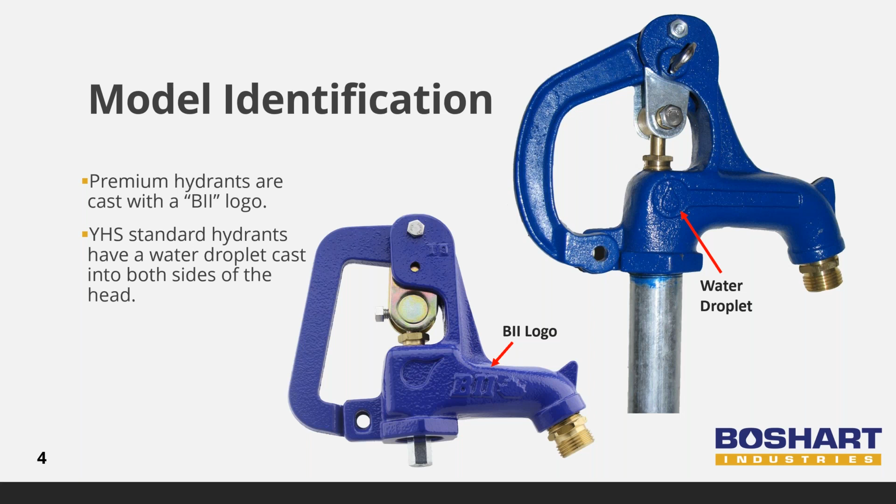So let's start off with what exactly is a yard hydrant.

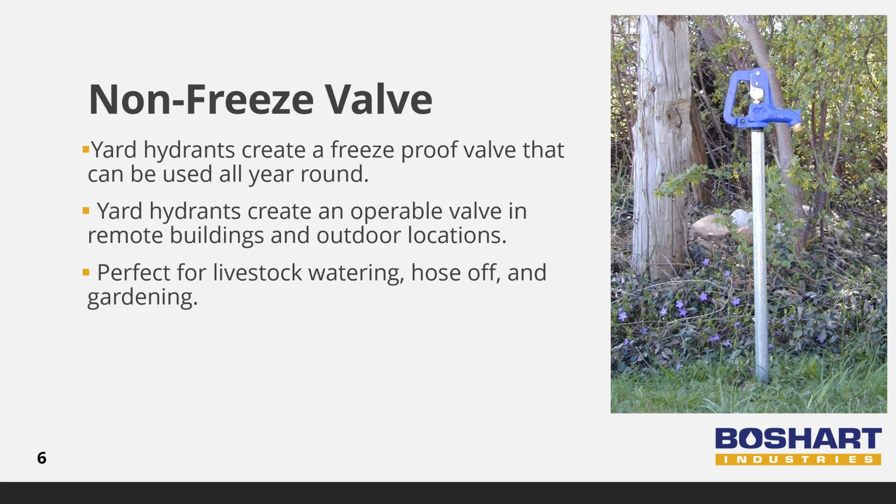Yard hydrants are frost-free. This means that they can still be operated in the winter when the temperature is below freezing, but there is no risk of freezing in the hydrant or in the service line, which would cause damage. Yard hydrants are just valves at a basic glance. They have a handle that operates the flow of water coming in and out of the hydrant. They are extremely popular for watering livestock, for outdoor hosing, and for gardening, all at a distance from the main water supply or the house.

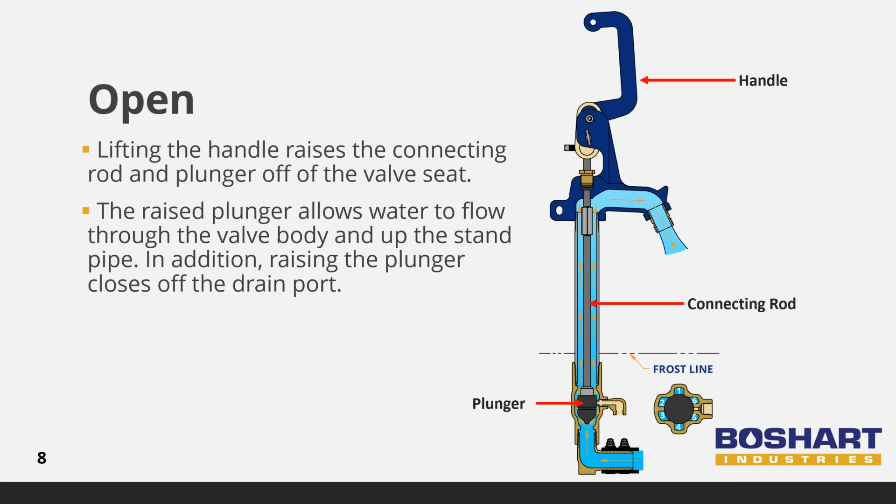But how does a yard hydrant prevent freezing in below freezing temperatures? When the hydrant handle is opened, the connecting rod raises the plunger off of the valve seat. The raised plunger closes off the drain port and allows water to flow through the valve port past the plunger. The water then flows through flow channels, up the standpipe, and finally out of the discharge spout.

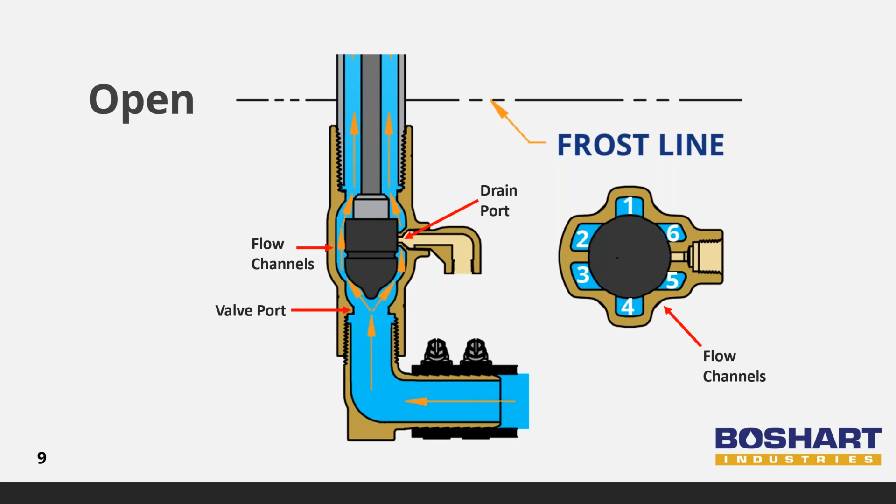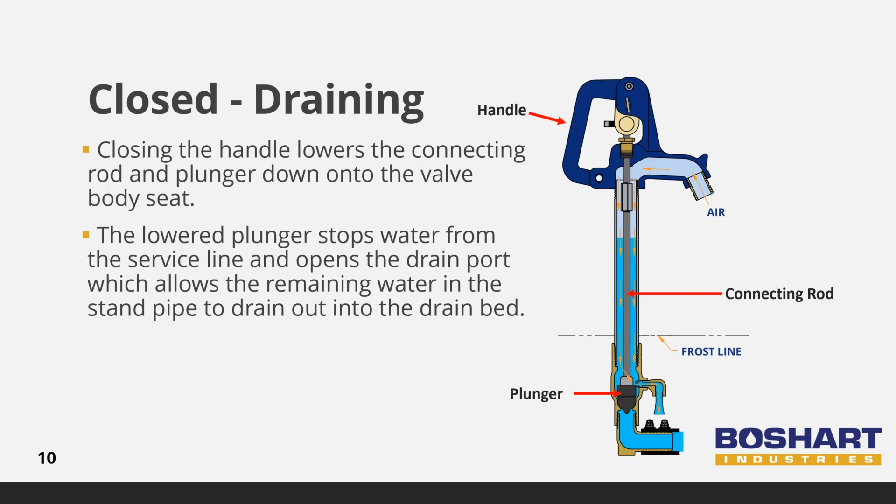When the hydrant handle is closed, the connecting rod lowers the plunger against the valve seat. This stops the water flow from the service line below the frost line where freezing does not occur. As the plunger is lowered against the valve seat, it opens the drain port and allows the water in the standpipe to drain back down and out of the drain port into the crushed stone drain bed.

For proper draining to occur, air must be able to enter in through the spout. Attaching a hose or some other device to the spout can prevent air from getting in and therefore stopping the draining process. For this reason, a hose should never be left attached when freezing temperatures could occur.

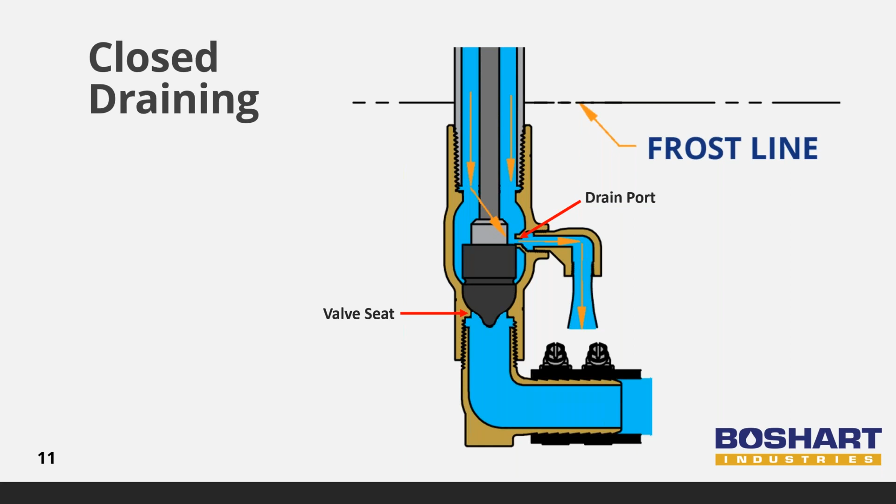The time it takes to fully drain the standpipe is approximately 45 to 60 seconds for a 4-foot bury hydrant. Depending on the bury depth and the quality of the drain bed prepared, the drain time could take more or less time.

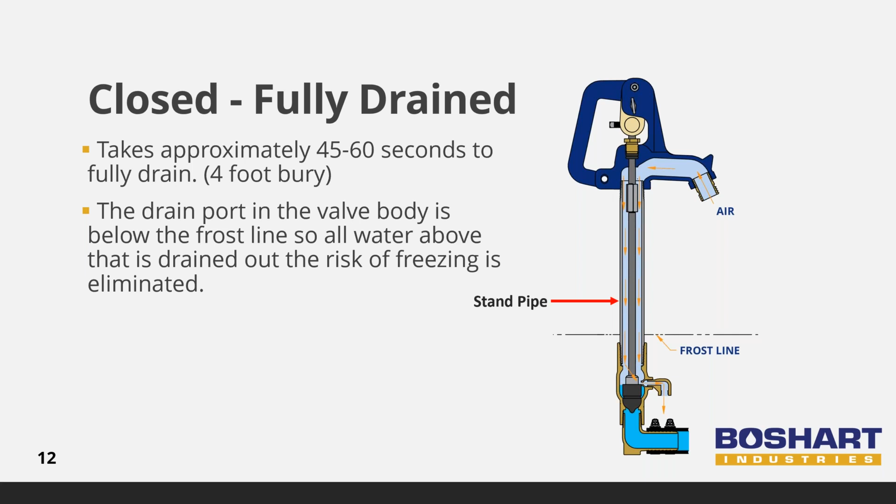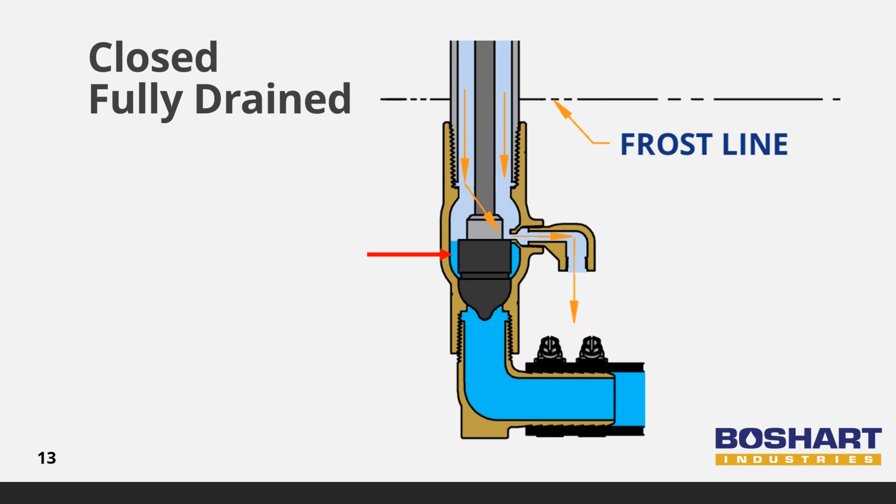When the standpipe is fully drained, only a very small volume of water remains in the valve body as shown by the arrow, all of which is below the frost line where there is no risk of freezing. All the water above the drain port opening is discharged into the crushed stone drain bed.

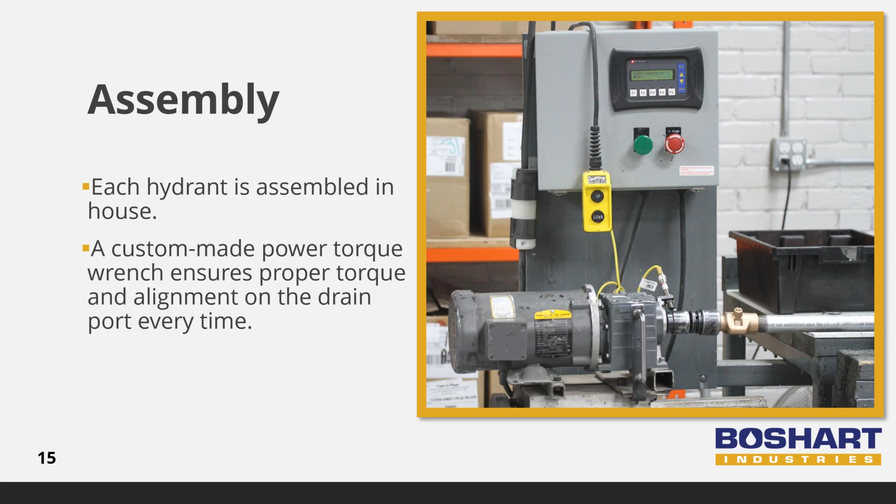Here at Boshart Industries, we offer several benefits and features that create an easy-to-use hydrant. Each premium hydrant valve body is threaded onto a standpipe using a custom-made power torque wrench to ensure proper torque with precise alignment of the drain port on each and every hydrant. The hydrants are factory set, so they will not need to be adjusted before installing them.

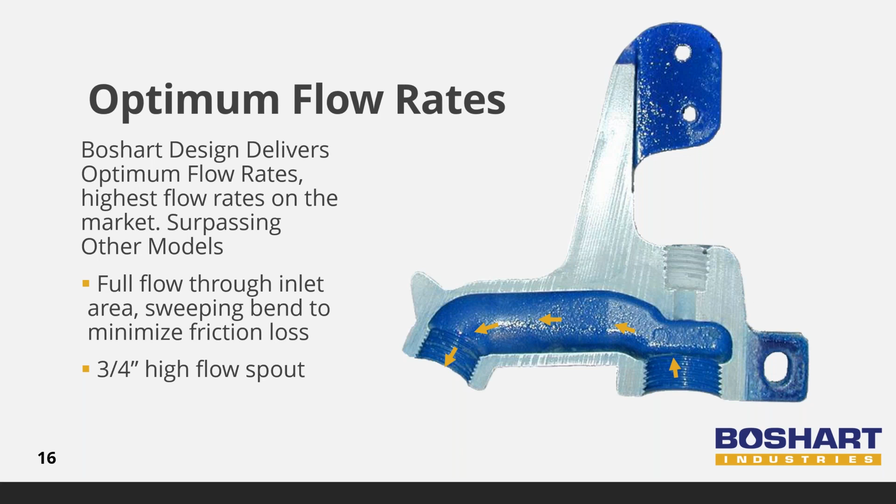The yard hydrant valve bodies allow full flow from the service line past the plunger, and friction loss is minimized because of a sweeping bend design in the head. Our models with a 3/4 inch discharge spout have a higher flow rate than some of the 1-inch high flow models on the market.

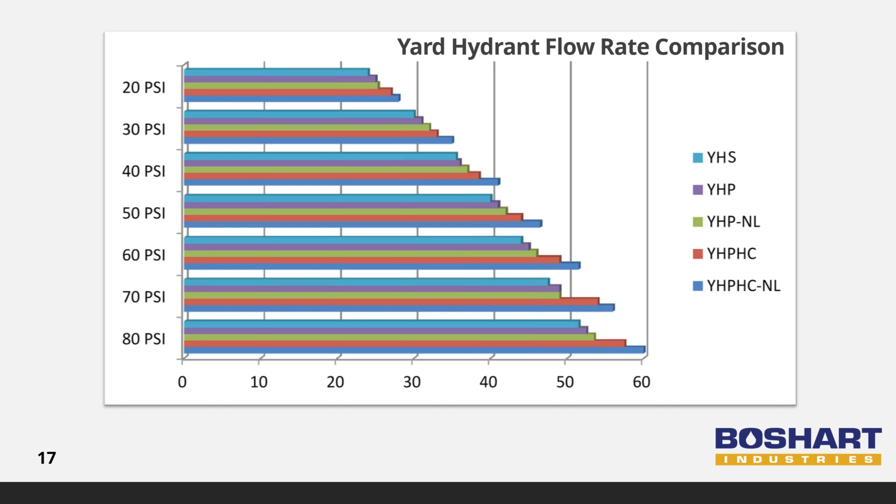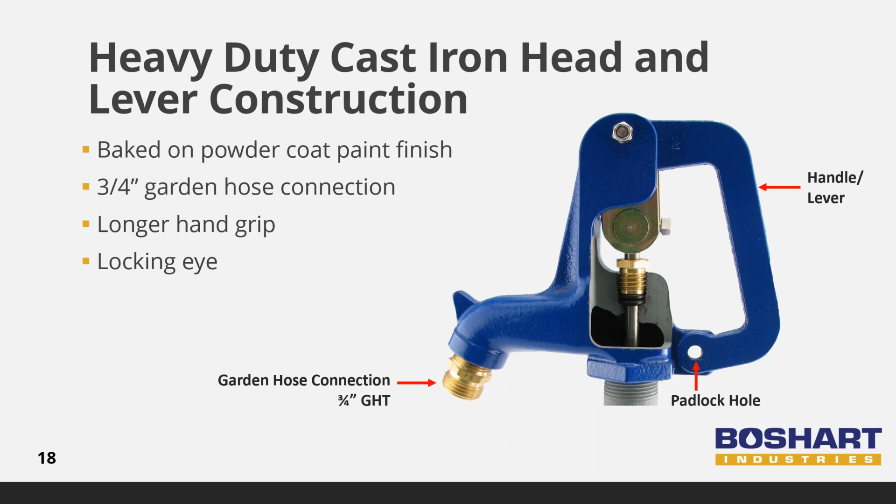Each hydrant is equipped with a 3/4 inch garden hose connection for convenient connection to garden hoses or vacuum breakers. The long hand grip handles are comfortable to use even while wearing heavy winter gloves, and each hydrant handle can be locked closed using a padlock with the hole in the handle.

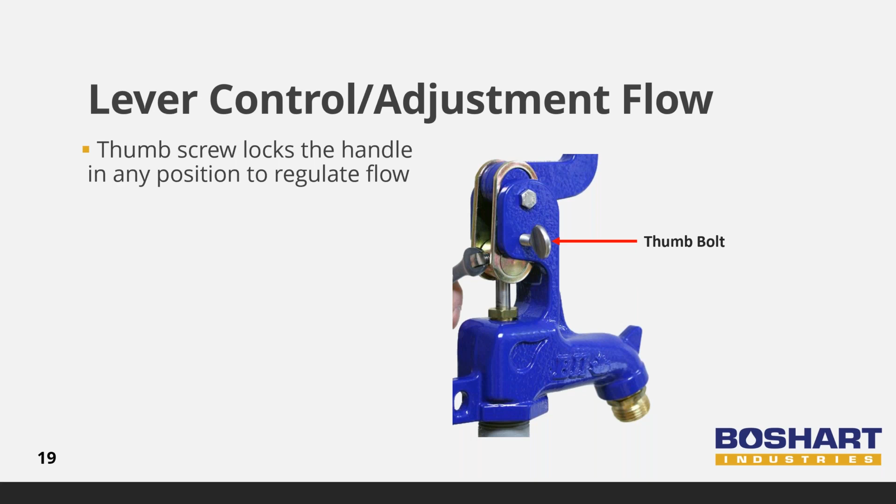The heads have a locking thumb screw which will hold the handle in any position. This is perfect for regulating flow to a garden hose when full flow is not required, like watering plants.

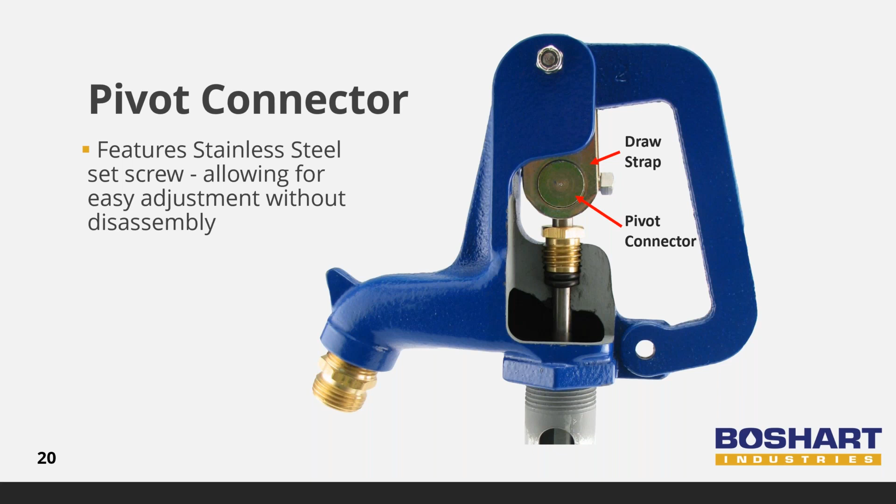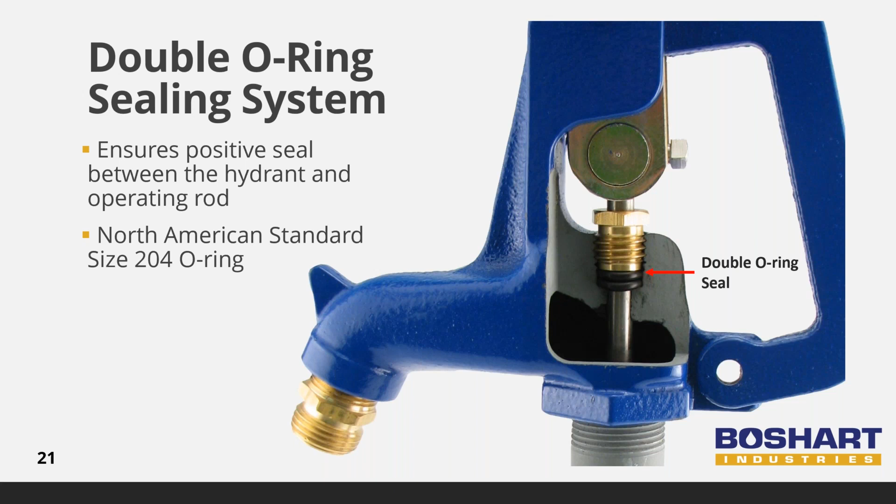If the O-rings do need to be replaced, they are a North American Standard AS568-204 size, so they can easily be found at hardware stores.

The operating rod in the head is made of polished stainless steel, which reduces wear on the double O-ring seal and has great corrosion resistance against the elements.

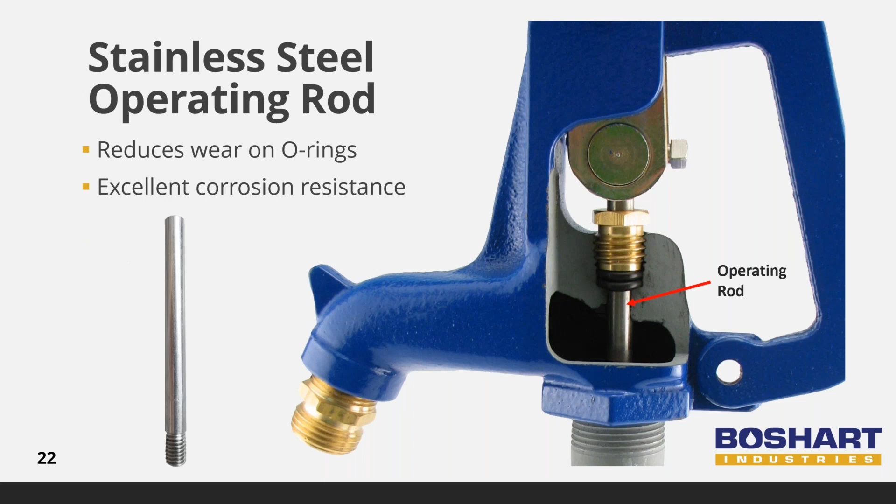Boshart offers 2 materials for the standpipes, galvanized and 304 stainless steel. The stainless steel will be more expensive, however, it is more corrosion resistant in aggressive soil and water applications. Be careful of some hydrant brands that don't have true ASTM specification pipe. Boshart uses true schedule 40 pipe for both premium and standard models, which can have up to 10% thicker wall.

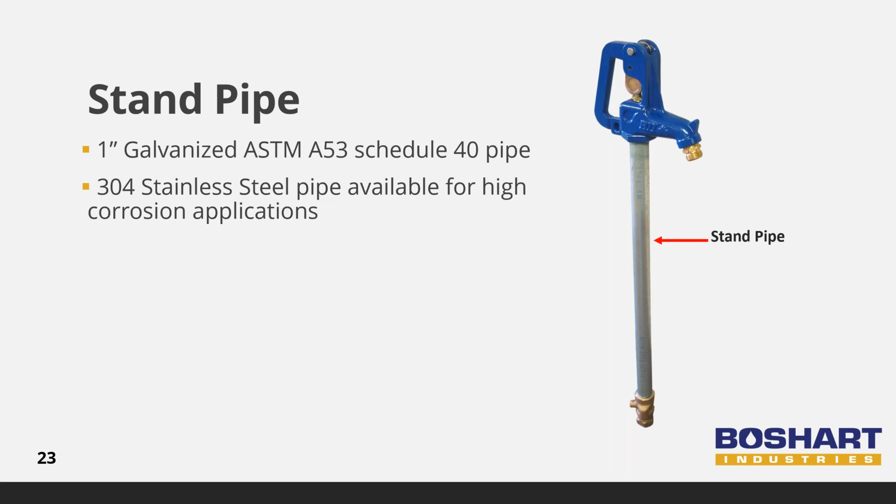The valve body includes the drain port, which is responsible for the non-freeze hydrant. The leaded valve body hydrants are suitable for washdown applications or where the water won't be consumed. The non-leaded hydrants are a great choice for livestock and gardening or where the water could potentially be consumed.

On all our no-lead yard hydrants, we use a longer valve body with longer female threads so that the standpipe threads are fully concealed inside the valve body when assembled. This feature, combined with rust-inhibiting compound on the threads, ensures optimum corrosion resistance for the galvanized pipe.

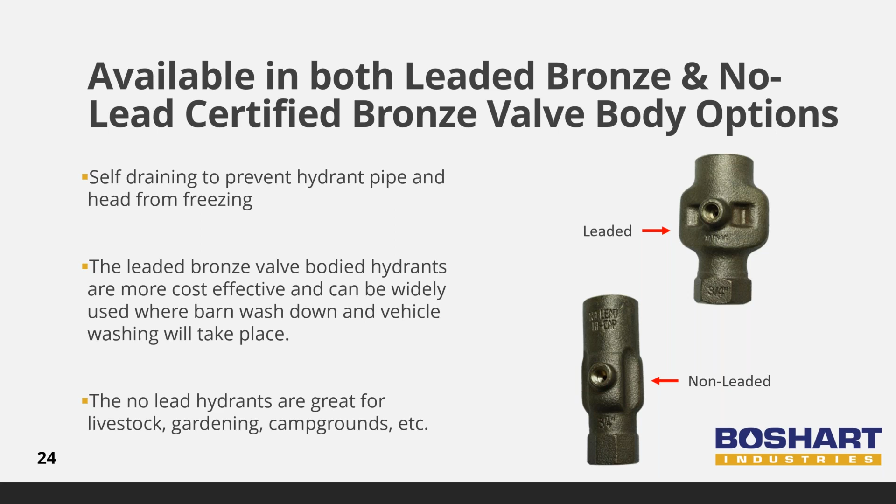As I had said, a benefit of the no-lead valve bodies is that the threads are made longer, so the threads of the standpipe are completely concealed, helping with corrosion resistance. As you can see, with the no-lead valve body, the full wall thickness is exposed to the soil, significantly increasing the life expectancy.

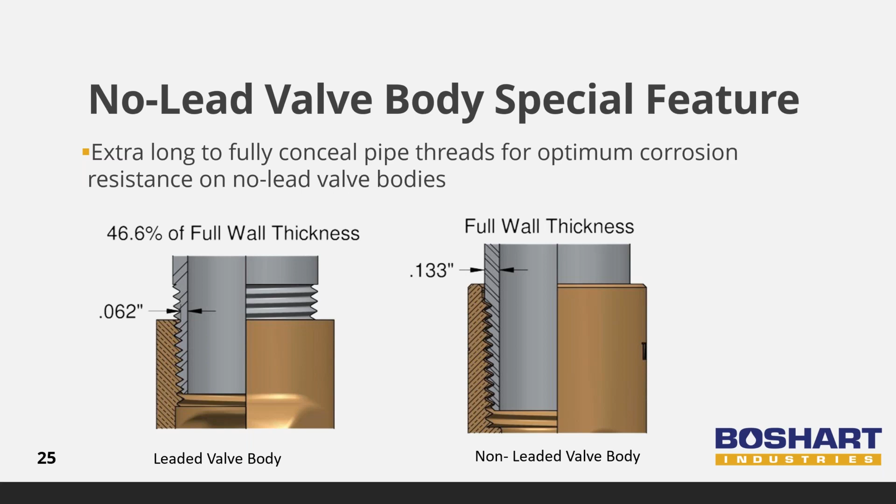The plungers seal positively against the angled valve body seat, and the cores are made from stainless steel for increased corrosion resistance.

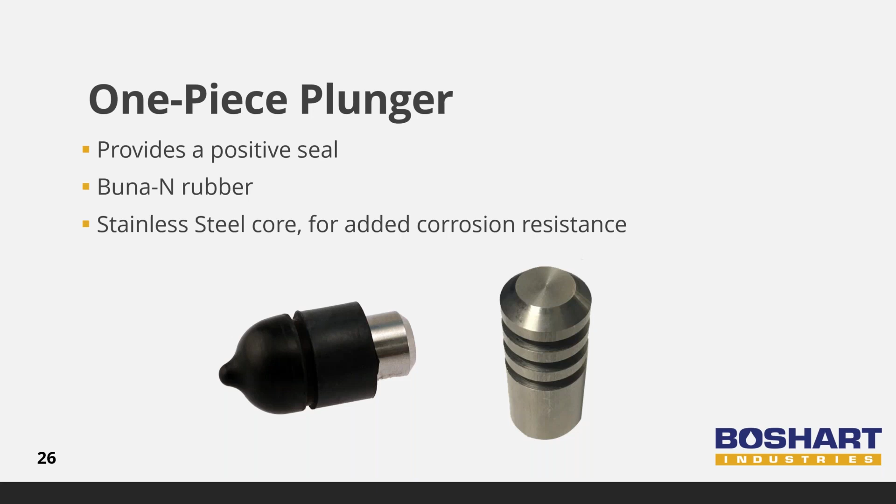The Boshart hydrants work on a smooth, straight pull system. This means that when operating the handle, the draw strap pulls the operating rod at 0 degrees vertically. This ensures that there is minimal wear on the operating components. When the handle is fully closed, the draw strap is 5 degrees over center, which allows system pressure to actually push down and remain closed. When fully open, the handle is 5 degrees over center again, so the system pressure pushes the handle to stay open.

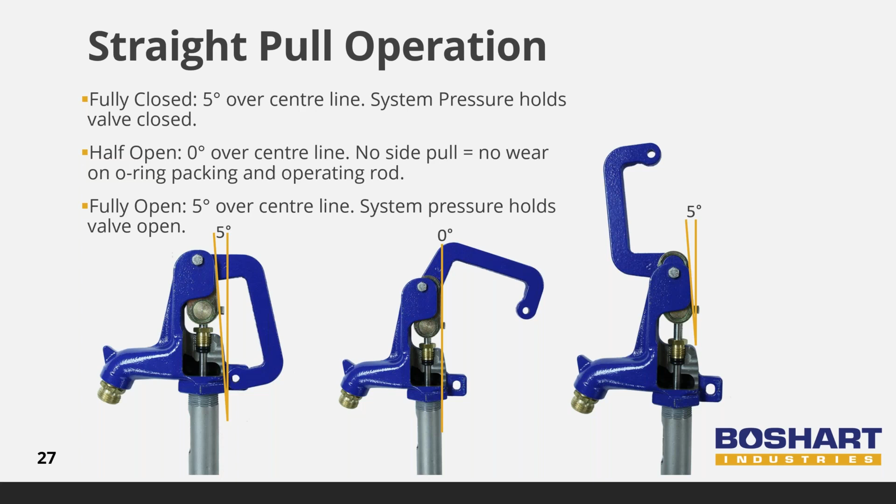Something that is not very well known is that it does not take very much force to seal the plunger against the valve body seat. The hydrants are factory set to seal and will not require any adjusting before installation.

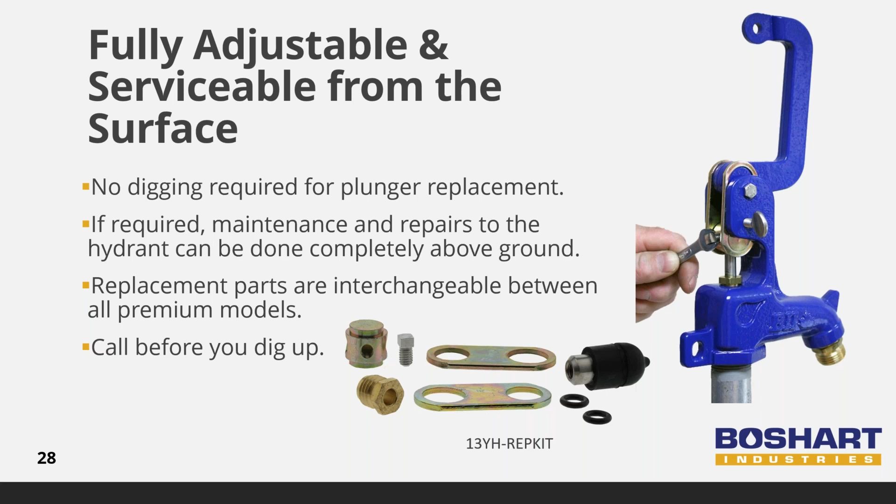Over the course of time, as parts inevitably wear, readjusting the plunger may need to be done. If that is the case, there's no need to dig the hydrant up. Adjustment and repair to the hydrant's internal components can be done above ground. Replacement parts are also available and interchangeable between all Boshart premium models.

The premium hydrants with a galvanized standpipe are covered by a 5-year warranty, and the premium hydrants with a stainless steel standpipe are covered by a 7-year warranty. Our standard YHS series hydrants are covered by our standard 1-year warranty.

After 2017, the manufacturing date was added into the head casting as well, for a quick and easy way to tell how old a hydrant is.

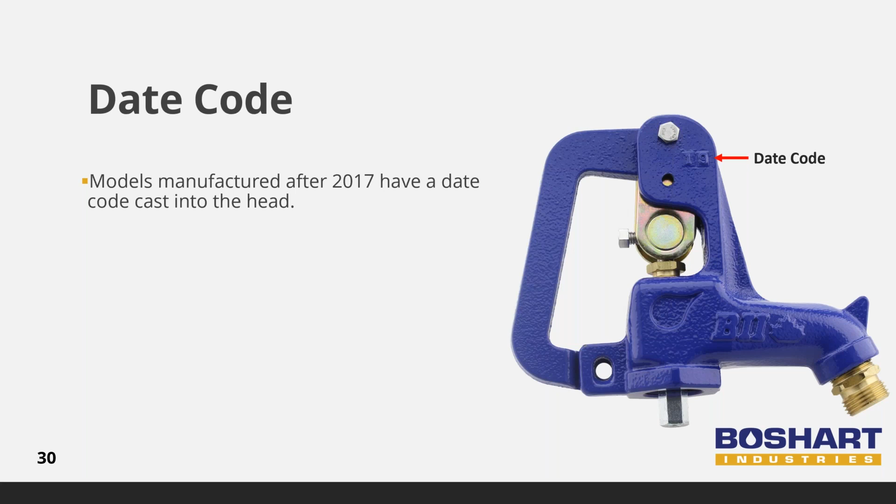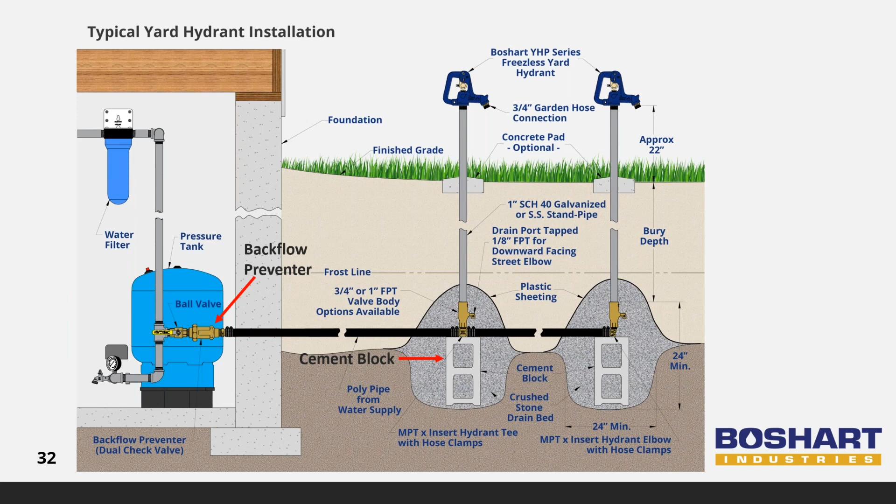Make sure that the water line is flushed before install to remove any foreign particles. The prepared hole should be about 2 feet in diameter and must be below the frost line. A cement block or patio stone under the hydrant will stop the hydrant from settling. On the service line between the water system and the yard hydrants, it is recommended to install a dual check valve for backflow prevention. I will touch on this again in a little bit.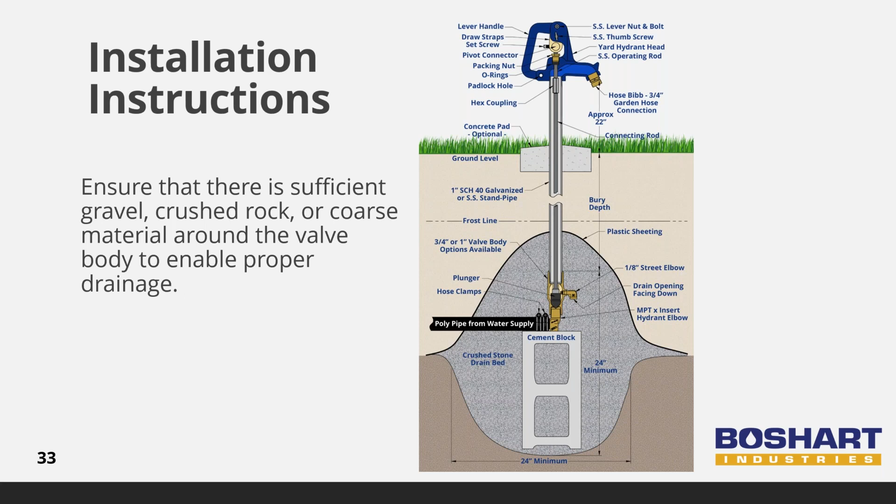Be sure that the hydrant valve body is installed below the frost line and that a significant amount of gravel, crushed rock, or some coarse material is below and around the valve body. This will permit proper drainage.

Connect hydrant to water line by using appropriate fittings, elbows, and tees, which are all available through Boshart. The purpose of a raised pad is so that the pipe and the clamps do not contact the cement blocks.

When tightening the fitting, be sure to hold the valve body with a pipe wrench so that it does not screw further into the hydrant standpipe. This would change the factory adjustment of the plunger.

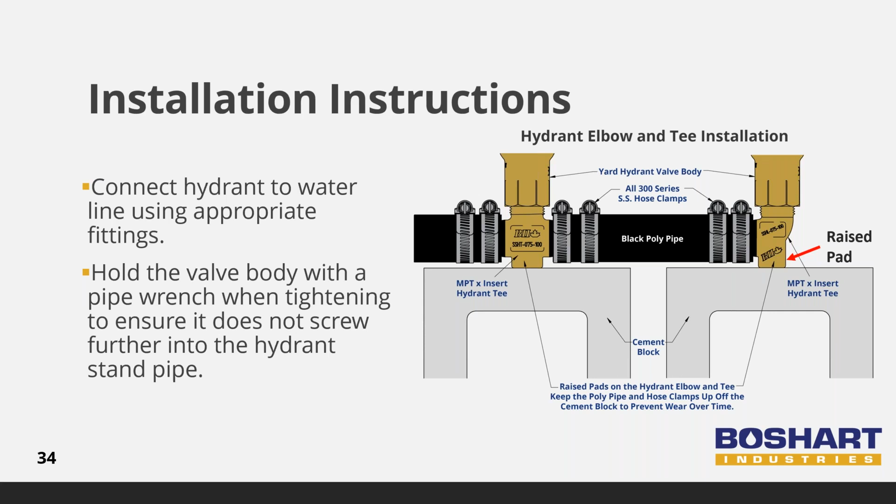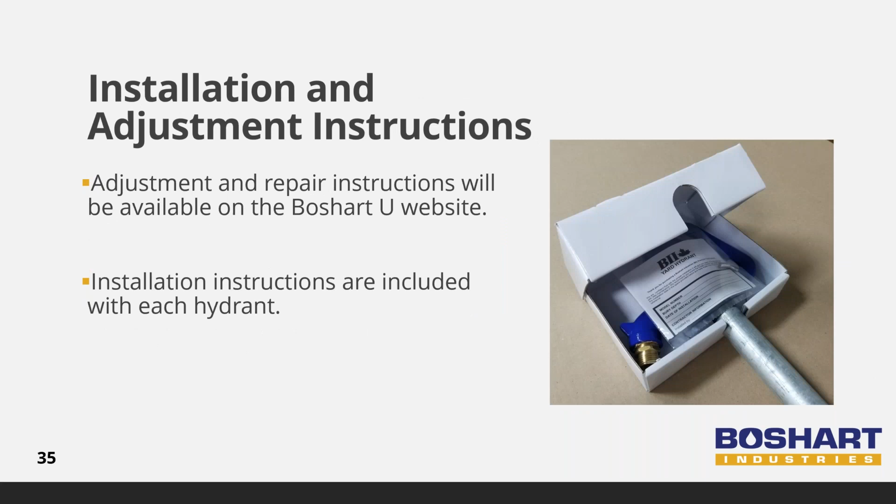The adjustment and repair instructions will be posted on the Boshart U website. Each hydrant is packaged with installation instructions as well.

Installation of a 90-degree street elbow installed in the 1/8 inch female pipe thread drain port will greatly reduce the chance of dirt getting into the port and blocking the drain.

After installing, test to make sure that the line is flushed and that the hydrant is fully operational before backfilling. Failure to do so could result in an issue with the hydrant and will void warranty.

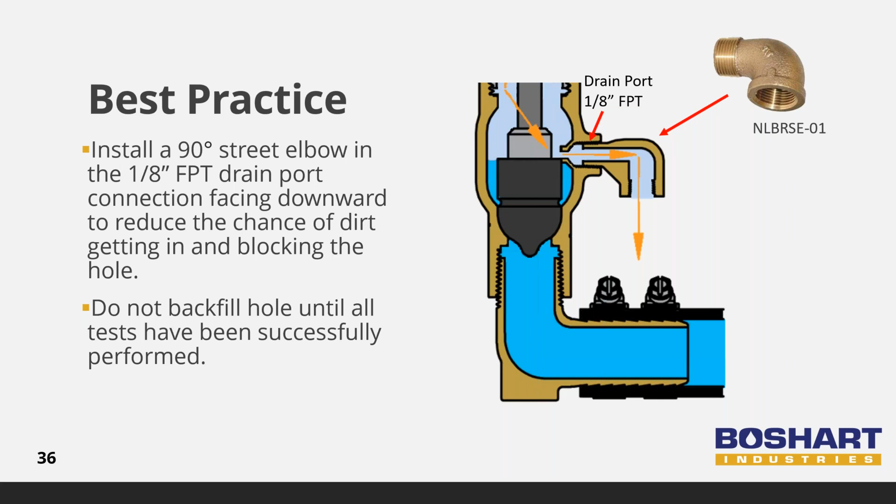Codes can vary widely depending on the state or province and local plumbing codes. I will give an example that is code in some jurisdictions, but it is still a good idea even in areas where it is not required by code.

A yard hydrant with a threaded spout to accept a garden hose needs to have an approved vacuum breaker installed. Approved vacuum breakers comply with the ASSE 1011 standard or the ASSE 1052 standard. These standards can be found stamped on all Boshart vacuum breakers.

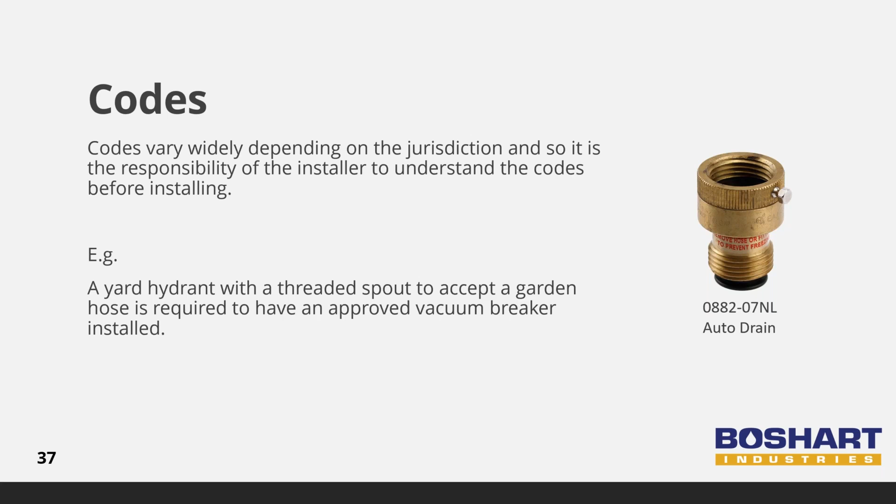It is very important to check with your local governing body to find the codes that apply to yard hydrants in your area.

The use of a vacuum breaker will prevent back siphonage through the hydrant. The garden hose must be removed in order to allow the vacuum breakers to drain. Typical vacuum breakers need to be manually drained by moving the internal check valve from the bottom in order to allow air to enter. Not allowing enough time for the hydrant to drain can result in the hydrant freezing.

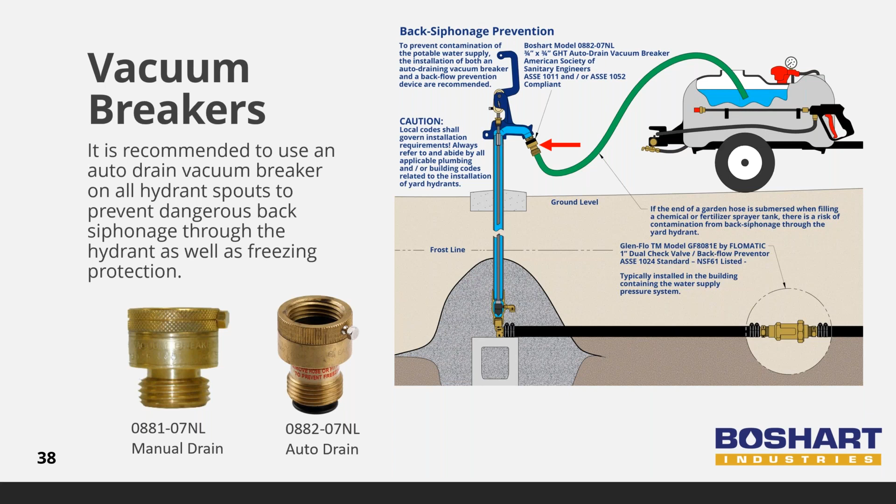The auto drain vacuum breakers eliminate the need to manually drain the hydrant. Just make sure that the hose is removed to allow the hydrant to drain.

Siphoning is a phenomenon when a vacuum is created in the system. This can be from excess use, such as firefighting. The system will pull from open outlets.

This would be dangerous if a hose is connected to a hydrant and is dunked in water with harmful organic matter, or into a tank filled with a chemical solution. The siphoning can pull that liquid back into a system.

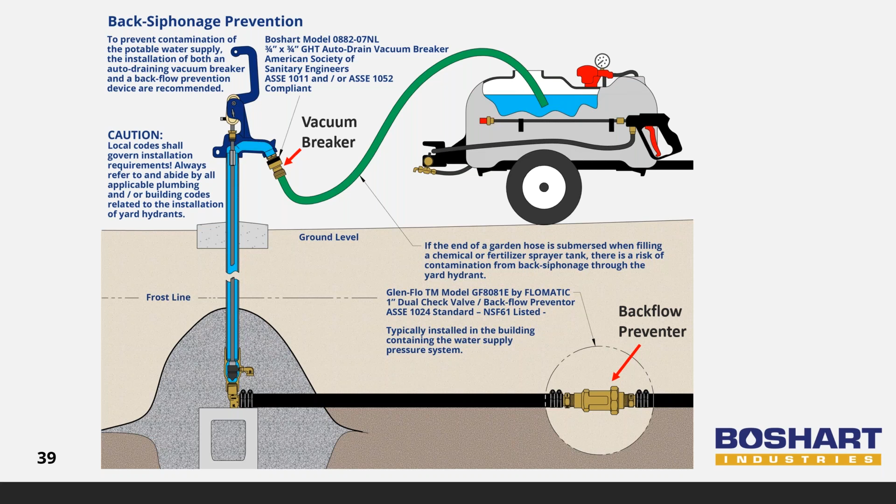For this reason, it is highly recommended that a backflow preventer is installed. A vacuum breaker attached to the hydrant, as shown in the picture, is a type of backflow prevention. Another type would be a backflow preventer such as a Flomatic dual check valve backflow preventer. There are some codes that require a backflow preventer, like the Flomatic check valve.

As I had said previously, Boshart does carry a standard import option for a more competitive model. We also carry accessories that can be used with hydrants, such as hydrant elbows, street elbows, vacuum breakers, and more.